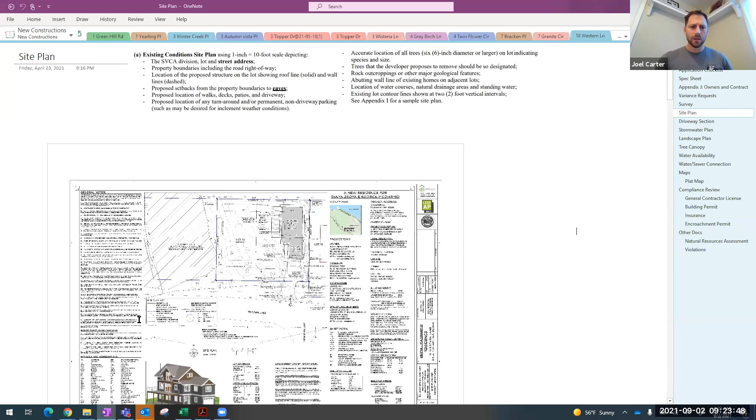I just have to share my whole screen here. All right, so you can see my reports up in the Google Drive. For the new folks here, I go through a checklist. That's part of my contract, and as we review these projects, I look for things and make sure they're all on the site plans and aligned with ACC policies.

If they're not, then I let the builder know—here are the items to address—and generally they'll come back with some revised plans, depending on how fast their designer can turn things around. Sometimes it's days, sometimes a week and a half to two weeks. And I write up a little report and upload it with all the files in the Google Drive.

This project only had two items on my checklist, and they were minor issues. They've come back and addressed those already, so I have no issues here. We meet the height definition, driveway slope is good, property coverage and open space are great. These are probably the best plans I've seen all year in terms of checklist items.

There is some wetlands mitigation occurring on the adjacent lot, which I think they're waiting on the county critical assessment permit to come through. I don't know, Tanya, has that come through yet? You're good to go? Yeah, unfortunately, well, we got approved for the stormwater portion, but the wetland is still being held up by the person there. So hopefully we'll have approval soon, but we're just trying to get our ducks in a row. Hopefully everything will go smoothly after.

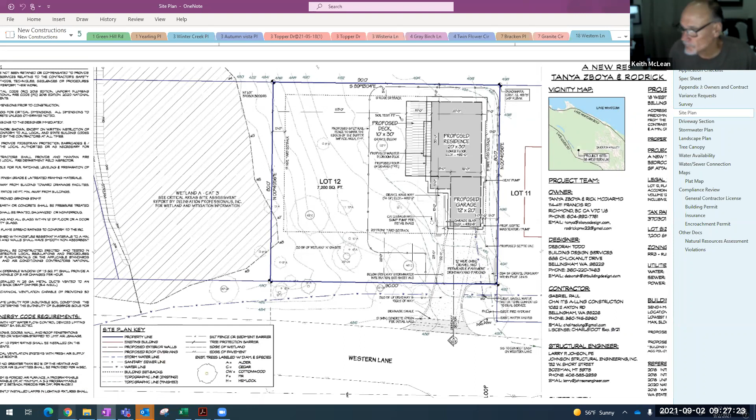So what do we have for the height? 29.8 feet.

I think we did have it marked, let's see. I don't always mark it if they are showing that dimension or not. Yeah, it's on the elevation sheet, upper right, south elevation. But I do usually run my ruler through here and check it out as well.

We're just trying to tuck a bedroom up there, so we went as high as we could to get them as much ceiling height there as possible.

Yep, there it is. All right, you're at 29, 10 inches. Okay, so we're there. We're tall, we're tall and small.

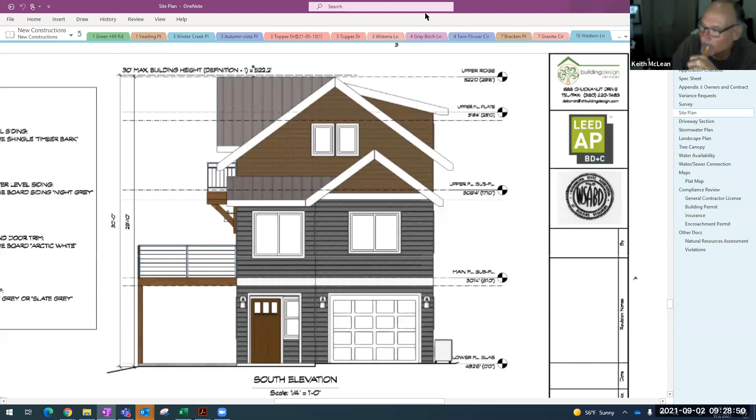Well, I know a lot of the lot had wetlands on it, so we made the adjustments.

I'm sorry, you can go back and show us what you were going to show us, a picture or something. Oh, that was it, right? I was looking for the elevations. I'm looking for just the file that has my calculations on it, but it's missing from my box of files here.

Well, they've got it listed as 29 feet. Is that 10 inches? Yeah.

So for those of you who are new here, there's two height definitions. You can take it from the lowest grade, 5 feet from the wall, and it can be 30 feet from that point - that's the finished grade. Or we can do 20 feet tall, generally from the highest grade, and that's 10 feet from the structure. So on sloped lots, you can have two different heights - you can build a home and have it be tall on one end but still meet the height requirement on the uphill side.

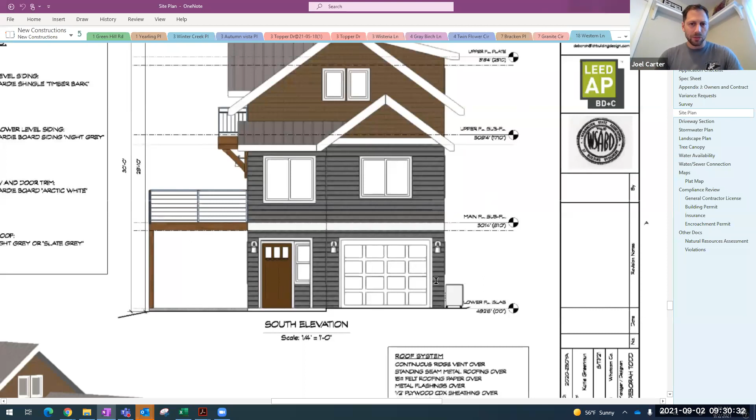So we don't have any issues with height here. I mean, we're in the threshold, providing they graded absolutely perfect.

But a new tool I wanted to show you too - I've got a 360-degree camera, so I've been going out and taking photos of all the sites during, before our meetings, and you can get a view. So if you don't get a chance to get around the lot and make a visit, I've been out there and we got trees ribboned.

So are those your photos on this drive that I was looking at? These photos right here are not the ones on the drive, I don't think. Let me check - oh yeah, I'm gonna check. These ones you need a special program to look and view. The photos up here in the drive are just taken on my regular phone.

Could you just wear a helmet with a GoPro and spin? Close - it's got a tripod and you have to hold it really, really still. But it's pretty neat, it's a neat tool. Yeah, they make gimbal 360-degree cameras for hard hats so guys can walk through job sites and do job walks with them. Yeah, that's cool. Anyway, another little cool tool, but this one's great.

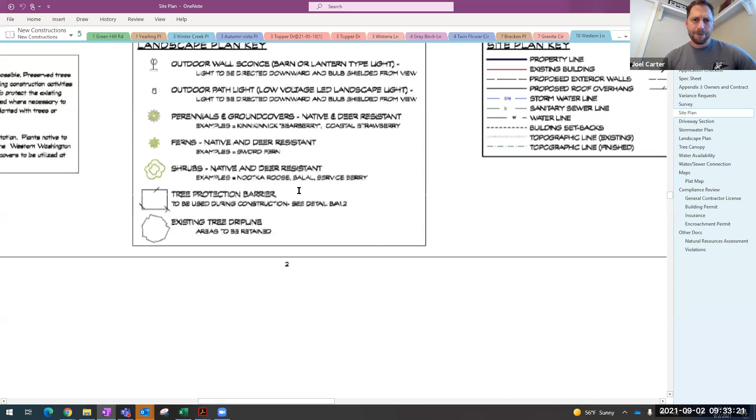All right, what do we got for tree removal? Let's see, did I mark them - there's one broken tree and one right next to it where the proposed garage is, and they're connected. So those are the only two trees that are coming down, those two. One's broken in half and fallen into the lot.

We want to keep all the trees, we're trying to build around them basically. Yeah, those are the only trees that I think were flagged too. Yeah, I saw you had a couple ribbons. That's where I was just curious, and no others.

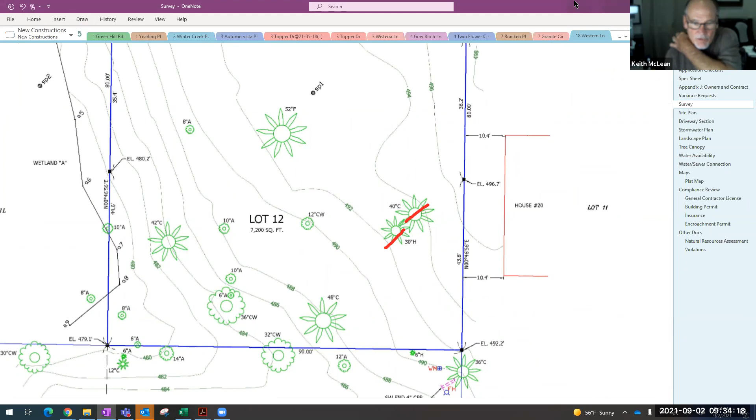All right, how about where your stormwater is going? Everything else is going to be fine. Let me go back to that site plan, blow that up. Good. Yep, under driveway, stormwater. Nice, yeah.

The turnaround's fine. Okay, anybody have any questions on this? Looks very thoroughly planned out.

Can I get a motion? I move to approve. Second. Who seconded that? Chad? Chad, yep. All in favor? Aye. Okay, it looks like it was unanimous on the condition.

You're working through the county wetland mitigation, so obviously pending that.

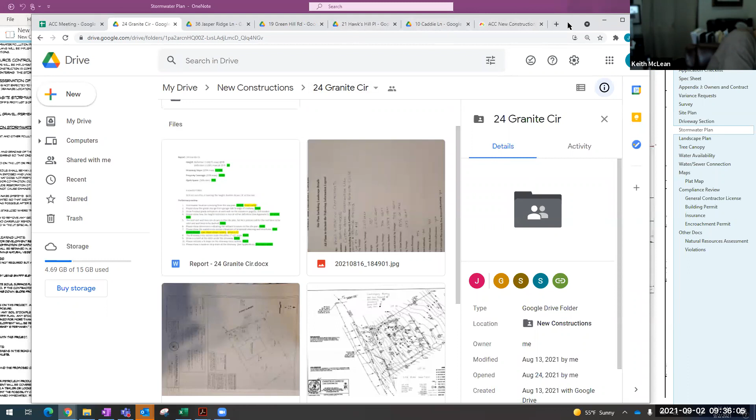Well, that was... why'd I have 19 Green Hill? This is 18 Western. Okay, all right Joel, all right let's jump to another one. I think it'll be easy. 10 Caddie Lane. This is item, I have it, it's item number 27 on the agenda. Item 27.

So let's see here. So this one, and we do have Chad Schmidt here from Rubicon to address any questions. Good morning, Chad, thank you for attending. Good morning.

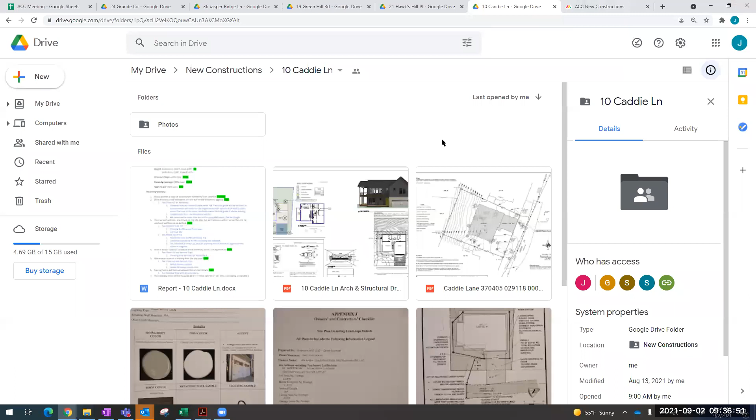All right, so here's the report. This report, we are at the 30-foot height limit, but we do meet it. Driveway slope is good, property coverage is good, open space is good. They've fixed a bunch of issues, and we do have some comments here about where to find those issues. Those come from the builder. We do have a nice flat lot here.

So little things like the driveway section being scaled, right? It's at quarter equals 1 foot. I'm not worried about it. If it's right, that's more detail than what the policy calls for. And the site plan has 1 foot contour lines, right? Our ACC policy calls for 2 foot, but more detail is fine, I don't have an issue with it.

So this was originally, I think, done by a different designer, and then it fell into Chad's hands and he had to make some modifications. I'll show you what the site looks like. So this is Gate 1, a couple of houses on either side. It's flat, pond across the road.

Trees are marked. That's a lot of trees. Here it is from the road.

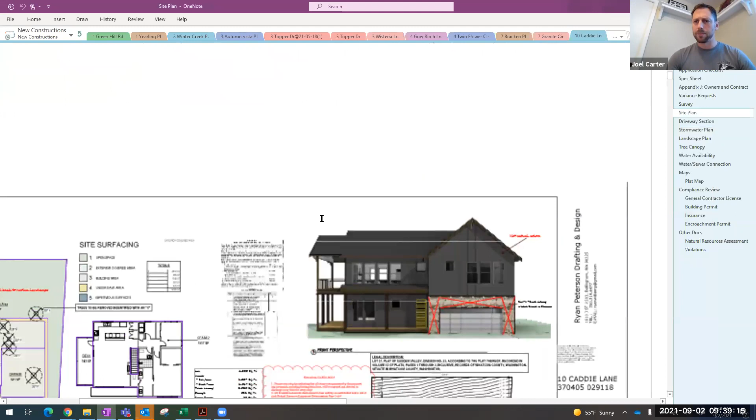Yeah, I know it is. And so it's nice because we don't have to have concerns about retaining walls and excavations. We're still taking out a lot of trees. So you can see the tree removal. Oh yeah, that makes sense now.

We're gonna keep some trees up in the front. All the setbacks are good. Yeah, let's see here. Setbacks side to side are 5 feet on either side, which is right at the minimum. The front, we're at 20. The rear is 29. Eaves are 1 foot and 4 inches.

So I don't have any issues with this. Let's see, let me get the spec sheet up in here. What was the lot coverage on this one? I can't find your sheet. 33.9. And there's 59% of open space remaining.

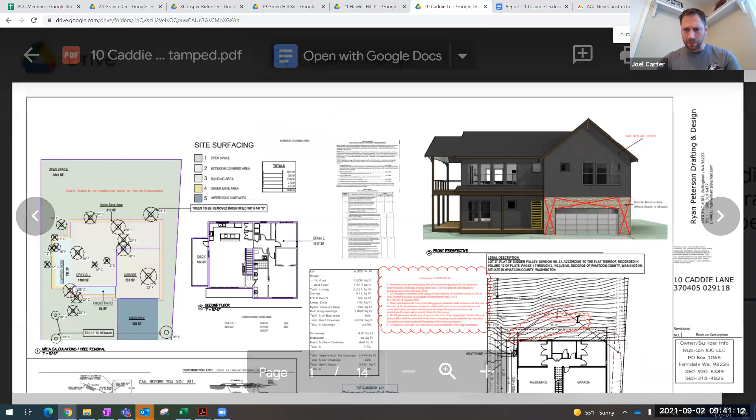Did those plans show where the stormwater was going to be located? Yeah, I think that was something that I had to send back to him. Is it on this one? So because it's flat, it's probably behind the house somewhere, right? It's up in front. Oh okay. Yeah, here's our stormwater. We have to daylight into the pond, so we had to put it up front. Oh okay, that makes sense.

The county did not want it going down that hillside. Yeah, that was my concern, the drop off on the back, because I've seen a few houses where they put them behind and it then starts eroding when it overflows. It makes all sense not to send it that way.

Oh, I was gonna just take a look at the spec sheet. I think we're good on colors. Gray and white.

So these are Benjamin Moore colors. They're not on the pre-approved list, but they look fine to me, okay. That's just me though, everyone else can weigh in.

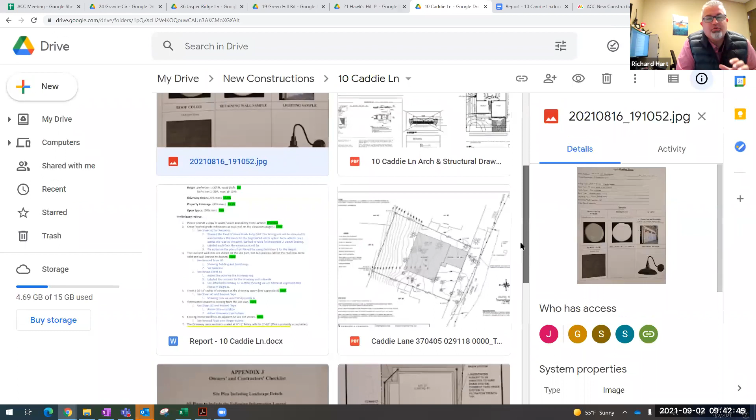I'm sure you don't want to do a nice bright yellow. Throw it out there. How about a blue trim, or fluorescent pink? I don't know if the neighbors would like it, but I would love it. Golf ball green - somebody in Bellingham would love it.

So we got it in here. Go ahead - no, it all looks good.

My only concern is we're gonna hear about the trees being removed. That's a lot of trees coming off and people are already concerned about what they're deeming clear cutting, and I get it - it's your house, and everybody lives here, and trees had to be removed for their houses to be built, but I don't want to take out excess trees just because the opportunity arises. I'm doing new construction, but it looks like all your trees - can you go back to the tree removal plan?

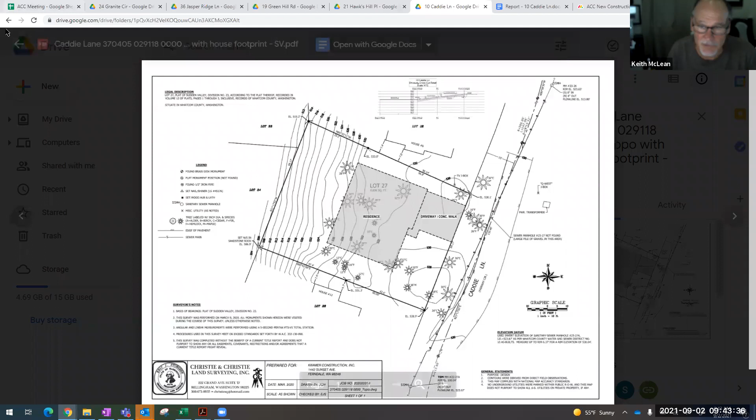Yeah, most of them are within the footprint of the house. Wait till he gets it up here.

I get it, the community doesn't see this - they don't get to see, hey, the footprint of the house, you're well within your lot coverage rights and abiding by all the rules and guidelines. The house is supposed to fit the lot, and reducing the house size, I can't see really making a big difference in the amount of trees that are gonna have to be removed. So that would be my only concern. I don't know if anybody else has any concerns or questions about that.

Is there a landscaping plan? We do have it filled out - it's upside down, but he's gonna replant 13 trees, right?

Yep, 13 trees and 52 shrubs that are recognized through the Whatcom County Association or Natural Resource guidelines. There's gonna be tree replanting and then...

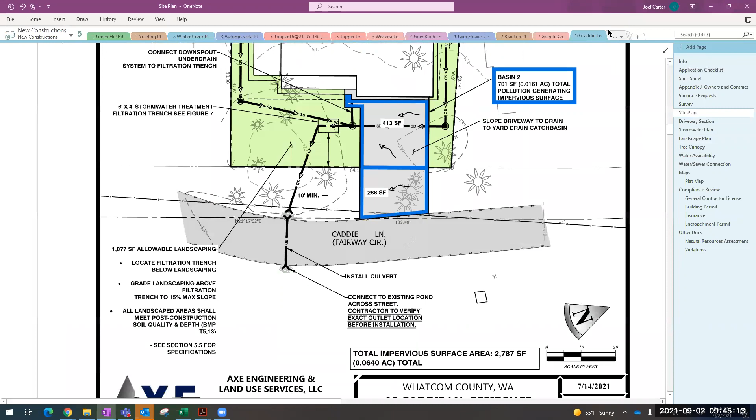I think it was on that plan - the one you put up right there. Plant locations, 13 new trees, 52 shrubs. All disturbed areas to be replanted in native landscape with mulch and new trees and bushes per Whatcom County plant schedule.

Perfect. No yard on this house - that's quite a slope in the back there. Was it about 20 feet in elevation?

All right, can I get a motion on this project? I'd like to know what color the garage door is. The picture was of white.

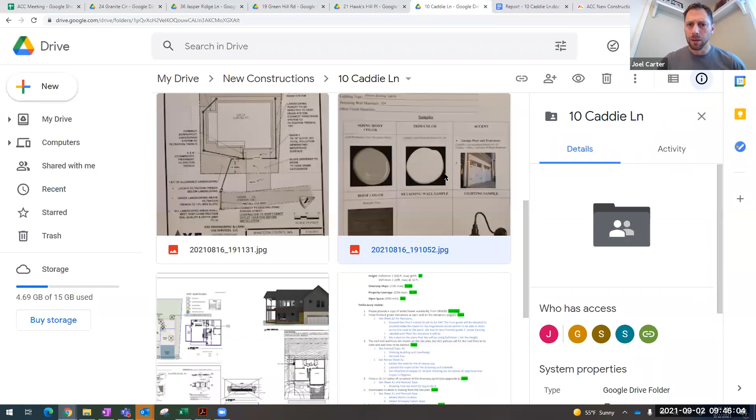So part of our conversation is that the garage door color should equal the body color - it says unless otherwise ACC approved. So they do have it proposed to be white, is that correct? It's the trim color, it matches the trim, so it's not the color of the body of the house.

He's asking for somewhat of a variance on this one, to paint the garage doors white and not the same body color as the house, and we can't allow that unless we all deem that appropriate with this house color. A lot of the houses do that now anyways. That's the problem - people keep painting it white because that's the way they come from the factory, but that's not what the guidelines say.

Are those the type of doors you're gonna put in, the decorative doors with the... exactly. It meets the architectural look, kind of the Northwest Farm look, to fit within the architectural look to match - the black hardware and everything on it.

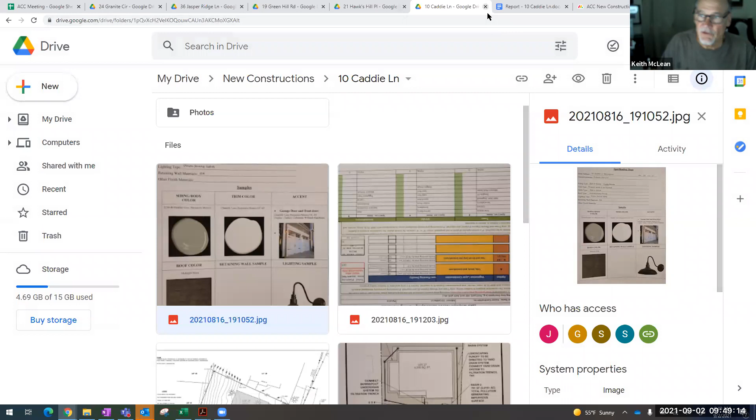I'll second. Okay, all in favor? Aye. Aye. Okay, that is unanimous then. That has been approved. Thank you very much for your time.

I appreciate it, thank you very much, and I apologize for not having as good a set of plans. We did not draw this one or prep this one. We bought it already like this and did what we could. We're going to Rubicon it, as we call it. Chad, I'm going through that on two of the houses I bought from Arrow. Yeah, I feel you, do our best to make it look really well. Great, exactly. Good luck, thank you guys.

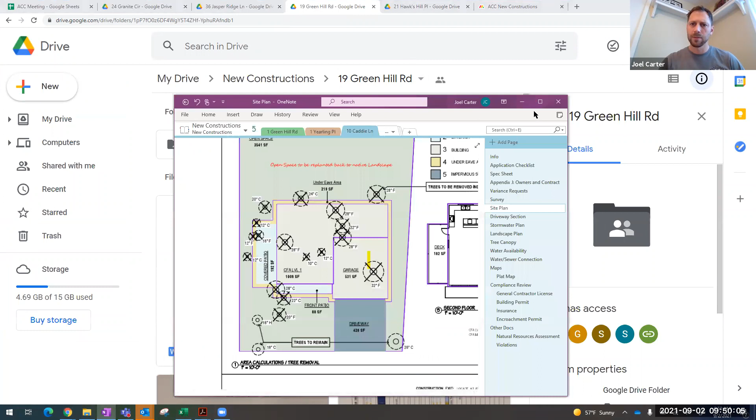All right, let's hop over and do 19 Green Hill. So this one, let me make sure, see if our builder's in here for this one. Yeah, so Sergey's here. Isn't that the same one we just looked at? Oh yeah, no, I'm not there yet, I'm checking the builder. Oh okay. So Sergey's here for 19 Green Hill.

So on this one, most things look good. We do have, I think, a variance in for the height, and then we're a little bit over the property coverage, open space. I think this has been recalculated actually to be, where is it, 36? About 36%, so we're only about 1% over. A lot of those small things have been fixed.

Existing home wall lines are not shown, unless it's really close, going to be close to the house. I don't see it as a big deal, and I don't think during a site visit. Let's check it out here.

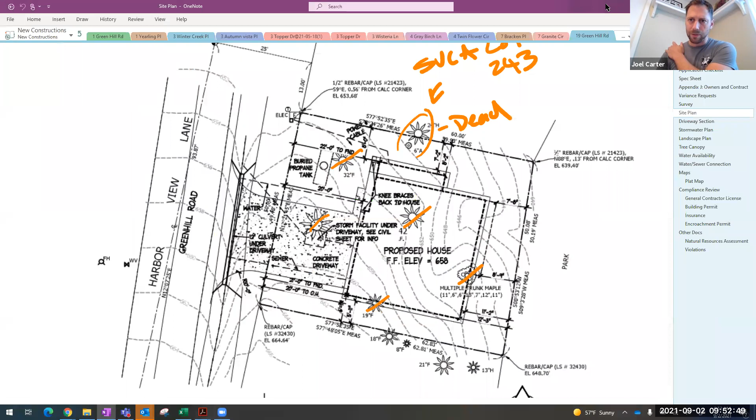Let's see, but one thing to consider on these variances too, we do have a very small lot, I think it's 3,071 square feet. So one of the challenges presented by these smaller lots is that a house, for the ACC policies, needs to have a minimum 1,000 square foot footprint. But then there's also the 35% property coverage rule, so the footprint cannot exceed 35% of the lot.

So if you have a 3,000 square foot lot, 35% is 1,050 square feet. So it has to be a minimum 1,000 square feet, but it can't be over 1,050. So there's a really small window there. This house footprint, well, this one's a little bit bigger, so we're at 3,071 square feet. 35% of that is 1,075 square feet, and this footprint's measured at 1,109. So just a little bit over. Something to consider when you're discussing the lot coverage.

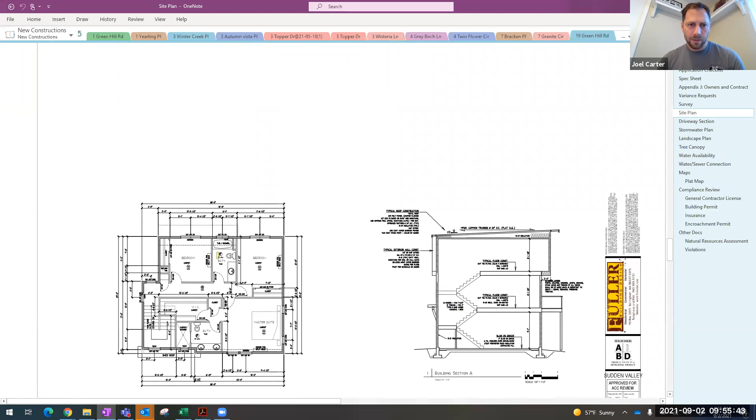So this is our garage, and basically we've got a laundry room and stairs up. Then our 2 living floors are each going to be about 1,000 square feet, same as the footprint. So our first living floor here, we've got kitchen, dining room, living room, and then we have bedrooms upstairs. Three bedrooms upstairs and a bathroom. So that's part of the reason why the house is tall, and we've got that variance. Does that make sense? It's kind of like they need to have 3 stories here for their house to work.

What's the ceiling height in between floors? Oh boy.

About 8 feet, 8 feet 1 inch.

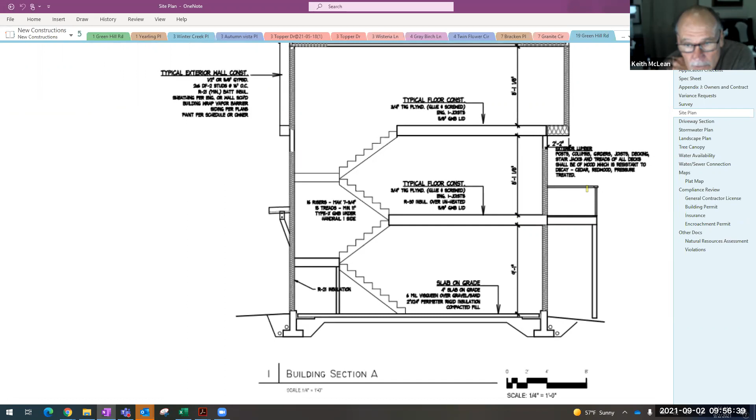Okay, so something to consider when you're discussing the variances—do you have a low slope roof? Yeah, I saw that.

What was the total height? 44, yeah, well it depends on where you're measuring from. Definition 1, the 30 feet, so from the bottom is 44. Definition 2, the 20 feet from the top is 24.75. If we're looking at the 20 foot, they just have to meet one of those height definitions. Then you're only 4 3/4 over.

What does that height do to the neighboring homes next to it? It's not going to tower over this one. This is the neighboring home, up the hill.

Let's take a look here. Let's go back—they don't really have any windows on that side anyway. And it looks like it's also a 3-story there. 1, 2, 3.

Yeah, it's a significant slope. There's not a lot you can do, and it is a super small lot. I think they're super small, but has the county granted variances for the lot coverage and height?

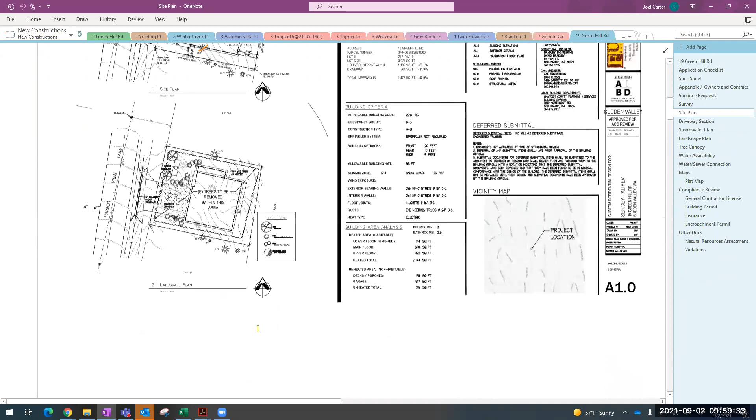How many of these houses do you live in? There'd be a lot of owner builder.

That's interesting, I'm surprised the county didn't have an issue with your lot coverage. You are over the lot coverage. The height is more of our issue here. It is a towering structure, man. I have to be honest, I think my house is about that high.

There's one second here. I do have—so the lot on the other side, this lot north of it, is an SVCA owned lot. So I don't believe anyone would be building there. Let me find it on the map here just to be sure. The green space lot, that's what you're saying? Mm-hmm. There is a dead tree right there as well. I saw on site that—

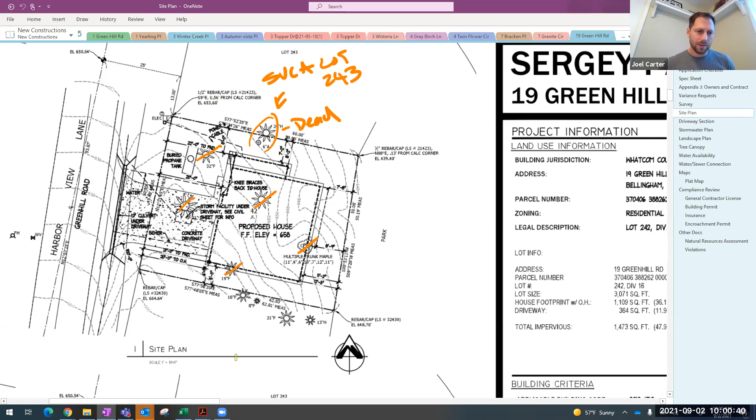I think it's gonna want... where do we have it here? Oh, you know what, I probably have photos of it. It's this one that's covering the maples, covering the leaves. Here it is, this one. So there's a dead tree there that I think is on the SVCA lot.

I'm not sure, maybe Deanna can shed some light on the tree stuff because the ACC coordinator usually handles that. How close is it to his property? Isn't it right on the line? Yeah, survey shows it being real close. Whoops, this is the wrong plans.

It'd be a heck of a lot cheaper to have it removed if you're already removing other trees than it would be to come in after the house is built and pay for a guy to climb that and drop it in 3 pieces. Yeah, we'd have him remove it if approved under his deal. Yes, that's kind of one of the things I was thinking—I'd be willing to take it down myself, just because it's right on the border there and it's a pretty dangerous tree.

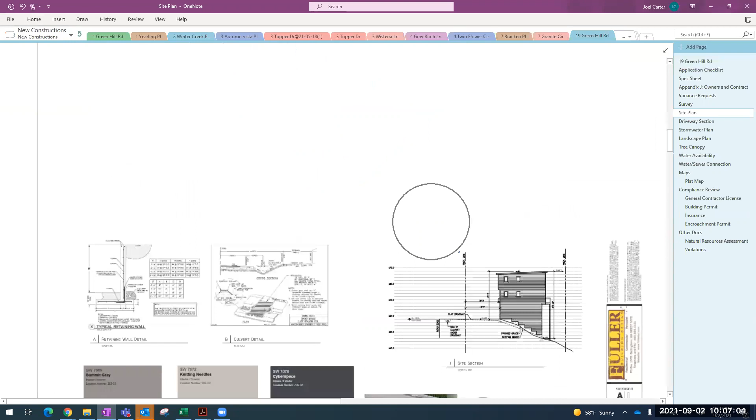Keith and guys, if you look at the way the house is sloped, the roof is sloped towards the front, so the perceived height is going to be less than what you're thinking. It looks like if it's a 1-2 pitch, then it's going to be almost 1.5 to 2 feet lower than the back of the roof. So at the front of the house, it'll look shorter than it's actually showing on the plans.

So the variance is what, from 24 feet to 29? Is that what we're talking about? Yeah, 24 feet is our limit, right? For this, 20 feet's the limit. It's at 24.7. So yeah.

I'm okay with it. I've seen this other house because I'm building on Kinglet right now. So I've seen it, and the house looks nice. It's a nice looking house.

Hi, this message is for Keith. This is Teresa calling from Mount Baker Vision Clinic. I was just calling to confirm your appointment. Sorry about that, guys.

So do we need to approve the height variance first, right? Yeah, we need a motion on the height variance first, and then we also need a motion on the lot coverage. It exceeds the lot coverage.

Okay, like I said, I've seen this house before, so I'll move to approve the height variance. And I would need a second. I'll second. Okay, second by Joe Jean. All in favor of the height variance? Aye.

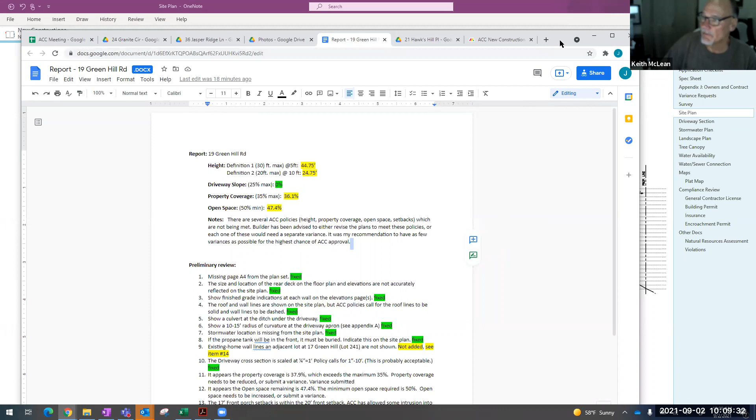Are you on the right one? I am on your owner's checklist. Appendix... owner's contractor's checklist. Okay, hang on, for design. You're looking at this appendix A. Yep, right there. Yeah, his actual plans call for, yeah, that right there.

All right, so is this incorrect then? The owner filled that out. That's not your thing. And so you're saying he's at what percentage? About 47, probably. It says 47.9% on the plans. So he's...

My understanding was that was a county requirement at 50%. Is that not correct, Joel? I'm not sure what county... if the county looked at their requirement and saw it at 51%, they'd think it's fine, not a problem. If the county approved it, that would be the condition I'd have to put on there, pending county approval.

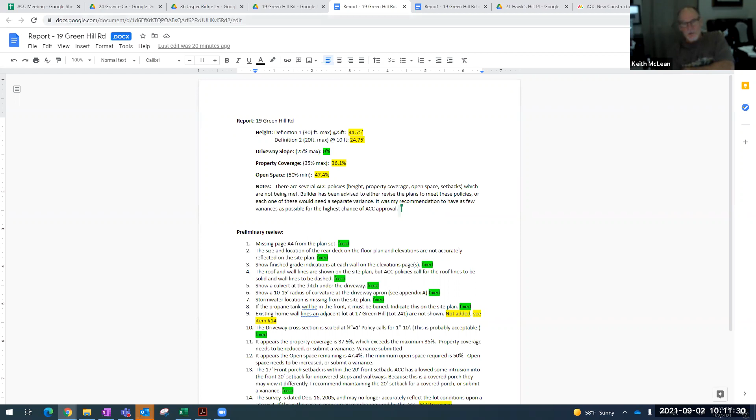I'm surprised, I really thought the county was 50% and we were in alignment with the county on that. But we can be more strict than the county, so that's why we're asking. His impervious calculation on the plans is 47.9, which means he's over 50% open space.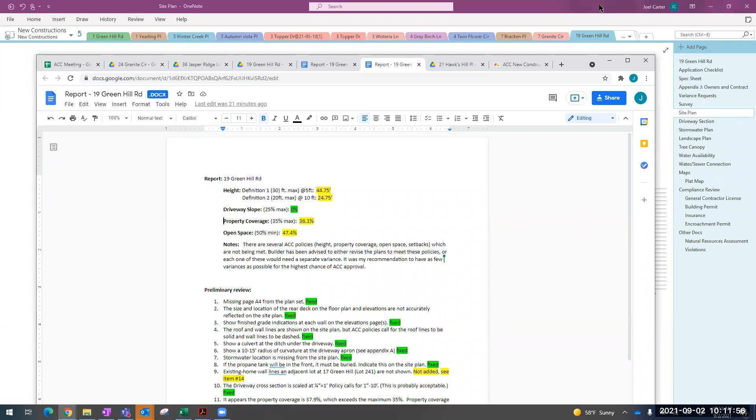Let's go back to that. The total impervious calculation on the plan shows 47.9%, which means he's essentially 52% open. Yeah, that would be correct, but I'm looking at it differently for some reason.

Joel, can you bring that back up? They'll show the impervious, but the way Sudden Valley calculates open space also includes decks. Even an open slat deck would be considered pervious, if it's not an overhang deck, then you have to add that to your open space calc.

Go back to your sheet on that, if you would, Joel. So property coverage for a house, that's just the footprint of a house, shouldn't be no more than 35%. He's at 36.1. But the entire open space can't be more than 50, and he's at 47.4. And that includes his decking and everything? Right.

Well then he doesn't need a variance for the open space. The only thing you need is for the 35% -- he's at 36.1, and he's still under the 50%. So I agree, technically we shouldn't have to issue a variance on it. It's really not that big of a deal, in my opinion, but I'm just one guy here. If everybody's in agreement with that, then I'll just move to approve the plans as is. Any further discussion from anyone?

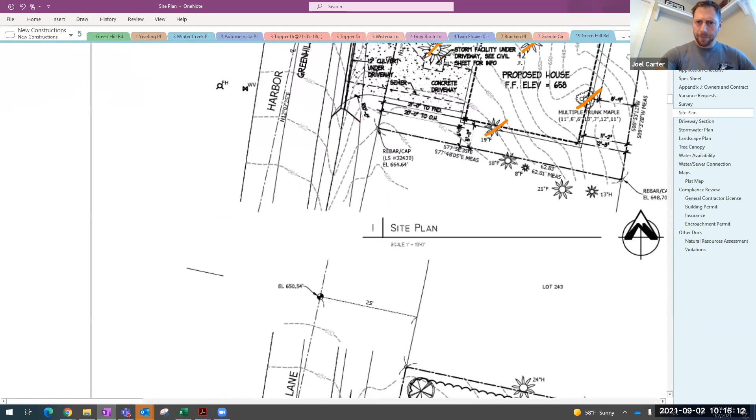This guy here, yep, that is correct. And the 8-inch is dead. So this one's dead too.

And you're willing to remove both of those? Yeah, providing you get the neighbor's approval. Yes. I'm in agreement with that.

So you'll include that in your county permit then? Yeah, okay, unless she's already got it permitted and then you're covered.

All right, did we look at the colors and all on this? Pretty sure it was gray, and grayish. Oh, nice picture there, yeah.

So here's the damage on that bigger tree that's being proposed to be removed, and then the dead one's the small guy behind it. There's some replanting too on this one after all this stuff is done.

I would have to confirm with the neighbor on what their plan was. Well, just overall for your construction plan, was there a landscape plan somewhere in there? Yes, there is.

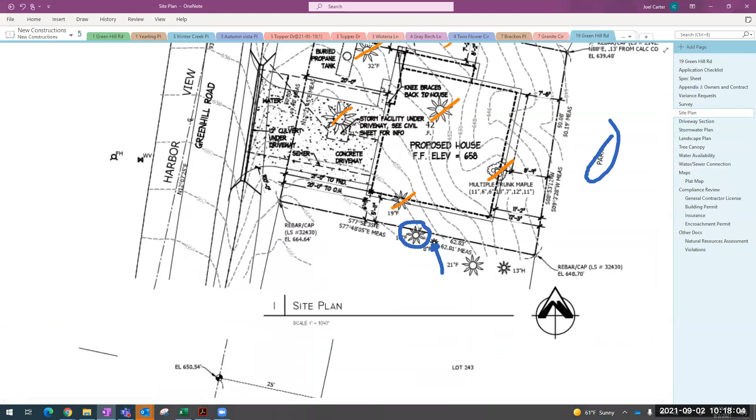Anything else on this one? Do you have his landscape plan, Joe? Yeah, let me pull up the...

Oh, where am I? He's got the plan, he's got the Lake Whatcom planting worksheet filled out for the county, and he's got location, plant legend, location and description, placement and description of plants, rock features, fences.

I think the only issue that I see is, especially where the elevation starts to drop off behind it, might want to replant ferns or something other than just mulching the back. That tends to be an overlooked thing in a lot of our new construction, the backside where we're not putting anything back to retain the hillsides.

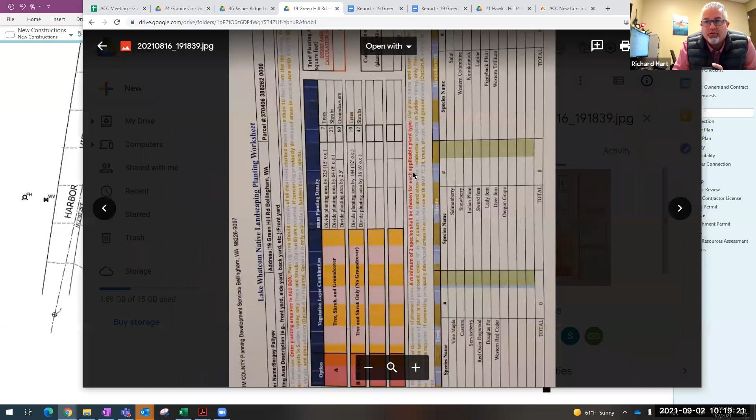Yeah, we'll be putting something. I like ferns and how they look and everything. We'll be replanting all of that, and just talking with Mike Kirshner about like 4 feet to 6 feet and just filling the whole area with plants.

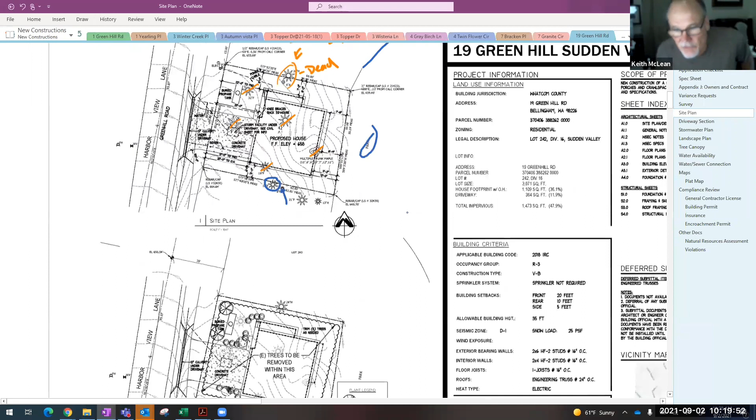Okay. Okay guys, any other conversation on this project? Okay, can we get a motion?

I move to approve with all of the variances that we've discussed. Second. Okay, all in favor? Aye, aye. Okay, it's unanimous, it's been approved.

All right, thank you very much. Thank you for your time. I appreciate it.

All right, let's see who else is in here on the meeting. We've got Connor and we've got Pavel. Pavel's got two builds, and Connor has one. So let's go, you want to start? You want to start with the one? Yeah, okay.

So we're at 20, this is 21 Hawks Hill Place. We're at the top of a hill in a cul-de-sac.

Steep, so we are on a steep lot here, sloping downward. You can see here's the cul-de-sac, houses across the street, a house to the side. There's a lot in between this house, and then we're just kind of going downhill there. The pictures on this one aren't great.

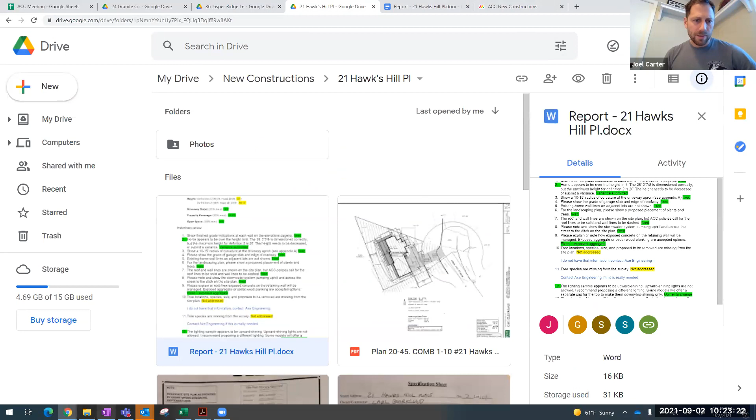And so what we're looking at here, let me grab it up here. Where's my stuff? I'll just use whatever's on the drive here.

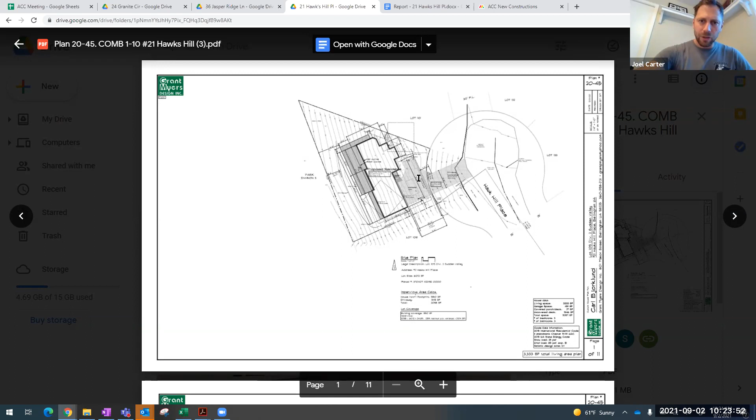So back's dropping off. We're at, and I don't think this one's going to look out of place or really tall from the roadway. Because it's sloping down toward the back, and you can see our cross section here, our elevations page. The driveway is going to slope down a little bit and then be an elevated flat platform. So from the street level, it's going to only appear to be a one-story house, and that's consistent with the house next door to it.

What's the bridge made of? Is that just wood, a wooden walkway, or is it going to be steel reinforced? It's going to be steel reinforced concrete. Concrete, okay, yeah.

And from the road, Joel, to your point, it's only a little over 11 feet taller than the road. I don't think we're going to be blocking anyone's view here with this home. So I think the height, the variance request is reasonable given the steep slope of the lot.

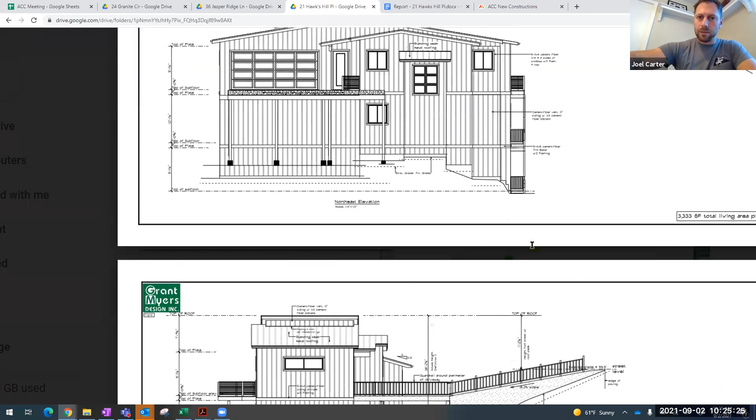So looking at this elevation page from the front of the house, you can see where the garage is going to be and where the driveway exists. It's only going to appear to be a one-story house, or it's going to drop down even a little bit from there.

So there's a variance for the height. What else do we've got here? Let's talk about... yeah, that's mostly it. Driveway slope is 18%. Property coverage is under the 35. Open space, we have 56% open space.

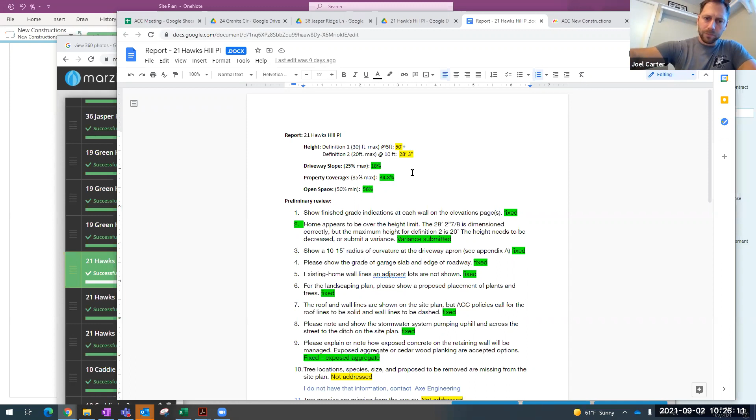They've come back and fixed a bunch of things from the checklist. Mostly just the trees to be ribboned is the only remaining thing. But what else? I guess let's take a look at house colors.

I think they're going to go in with a green. So it's not a Sherwin-Williams color, it's Benjamin Moore. So the house color needs to be approved. I'll have to double check the list, but I'm thinking it is, because I told Carl, I sent him the list and I said pick one from this list for that reason.

Was it? I can pull it up real quick. Could be. He could have went rogue.

It looked like you were going with a bit of a fancier garage door. Is that going to be painted too, or no? Possibly, it'll either be matching body color, or they might go a little fancier. Did you have a question specifically on that? Well, it's supposed to be the body color, but from that drawing it looked like it was gonna be a nicer garage door, so.

Like some of those glass windows or something? Yeah, it would either be body color or potentially like a fogged glass window. Okay.

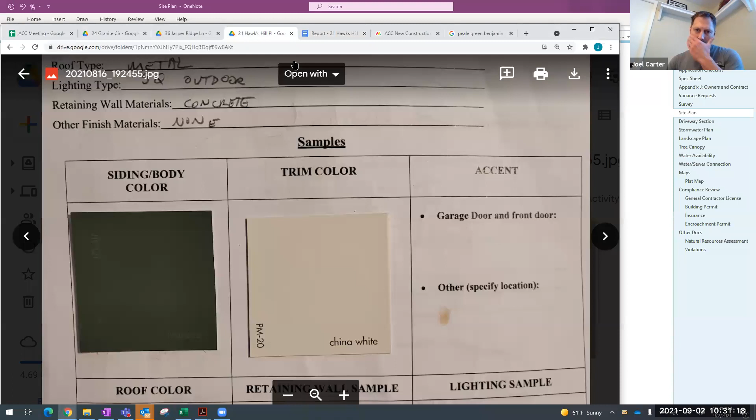So let's hop over to, let's see here, looking at the, excuse me, the plans here.

And they've got it marked out here. They have it dimensioned at that 28 feet.

Okay, while we're looking at that, what is going on the retaining wall? So you've got the concrete drive retaining wall in the front. What is that being faced with? It's going to be, let's see, I believe exposed aggregate. Did I write that in my report? Yeah, exposed aggregate is what it's going to be. Correct.

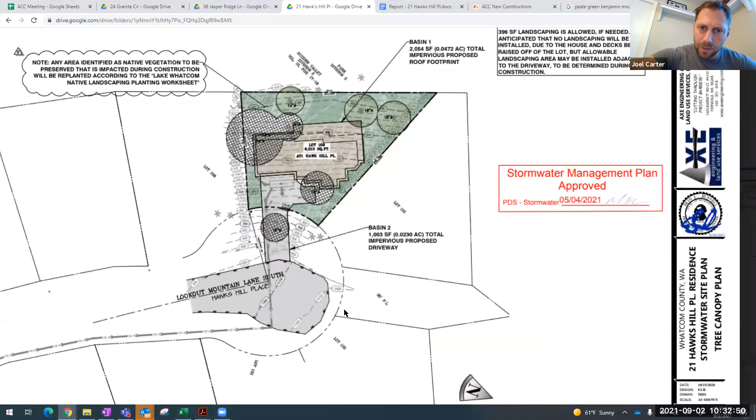Yes, here they do have the engineering tree canopy removal. So there's going to be 1, 2, 3, 4 trees to be removed. Yeah, they were missing from the site plan, and the designer said he couldn't, said that information belongs to Axe, and this is Axe what we're looking at right now, and he told us to ask Axe for it. But these are the trees here.

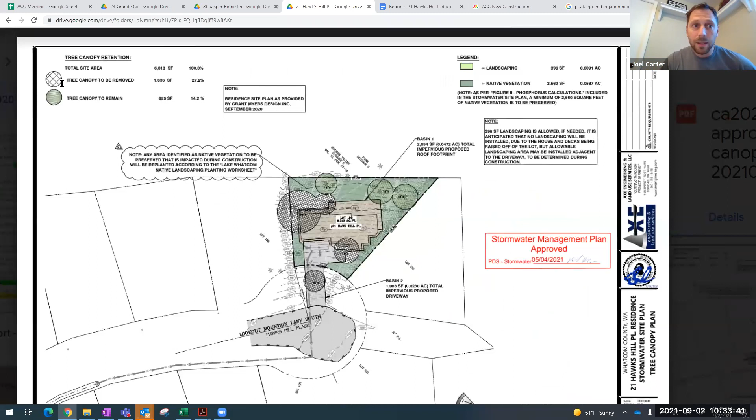All right, and what's his replanting looking like? So there is a note here. It says any areas identified to be replanted per the Lake Whatcom Native planting worksheet. Okay, go back here.

Just this, are there structural plans for these yet? Are there structural drawings for these yet? Yeah, we had them, right? They're in there. Yep. Full set.

Sorry, I lost track of what was it. Planting. Landscape plan. That's on the site plan, Joel, and it shows vine maples and sword ferns. Zoom out. Oh, I've got a different site plan in front of me, which I thought you had as well. I could shoot it over to you really quick because it has specifically that on it. Yeah, maybe it's different from the digital ones that I've got. I don't see it on mine. Give me 1 second here.

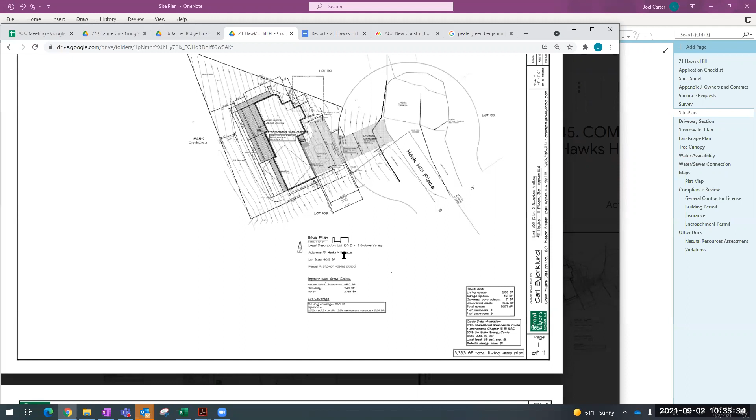All right, Joel, I just sent it your way. But for email - yeah, I sent it right to your email. I could illustrate what's going to happen while we're waiting if you want to jump over to that site plan.

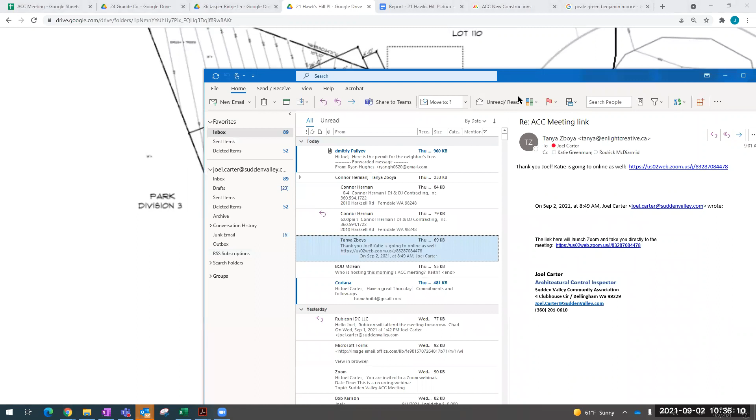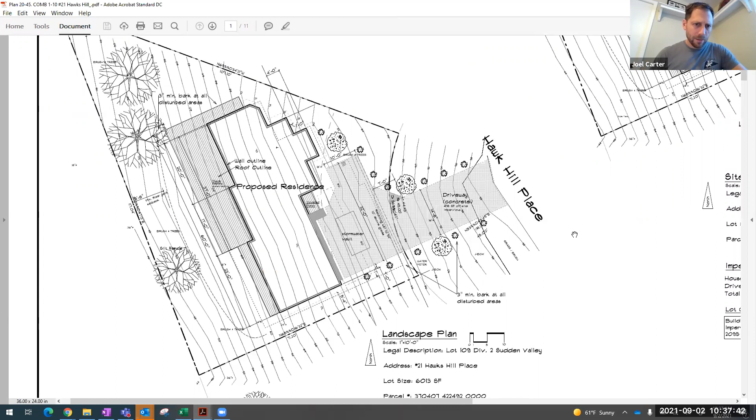These might be the original plans, are they? Yeah, I do remember seeing this. I don't know why. Maybe I left the old plans in the drive. Excuse me.

So do you have landscaping? Anything? Yeah, any area identified native vegetation will be preserved per the Lake Whatcom native planting worksheet.

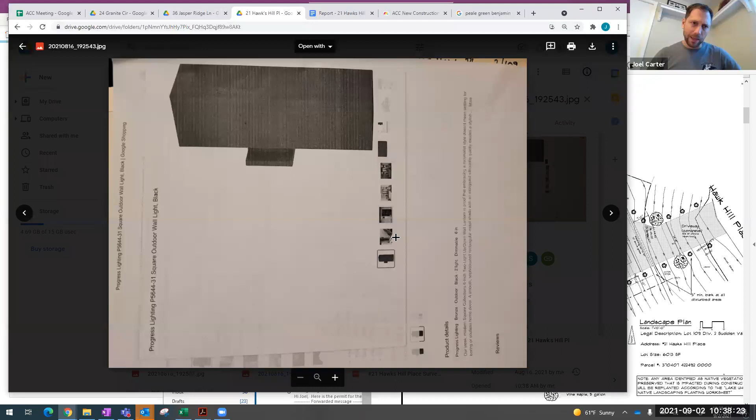Everything else, I don't have any issues with. I think this lighting sample does show that it lights up and down, and I think that was something he's going to pick out, new lighting that doesn't shine upward. Yeah, they make that same light that only shines down.

And I'll go back out and verify that the trees are ribboned. Here's our variance for the height.

That's it for this one, unless does anyone have any questions or concerns? Anything else I can show you? Yeah, the same concerns, the height. The height concern - I get it though, looking at it from the street, it won't be that high, but it still exceeds our height limit.

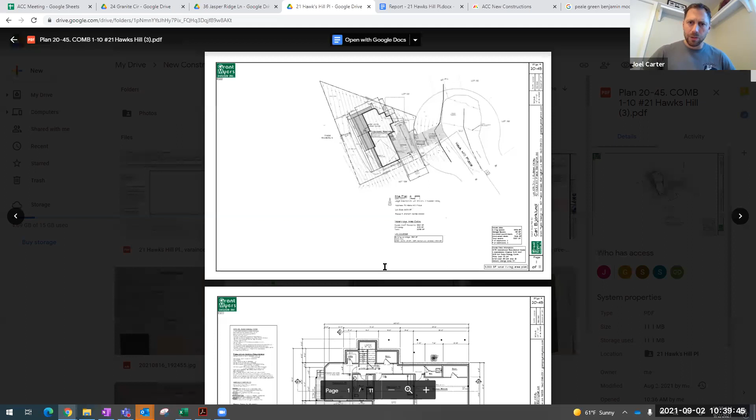So you are on quite a steep lot. Yeah, I think the challenge would be, if they're gonna try to get within that 20 feet, they have to lower their house where it stands 8 feet. Then that would exceed the driveway slope. It's a catch-22, yeah, we don't want to go there again.

All right, can I get a motion on the house with the caveat too that the trees need to be ribboned? They need to be ribboned. Need to see what's being removed. Yeah, last I heard he was working on it, or he was going to go out there and have them ribboned, and I'll verify that. I'll check in on it as well and make sure if it's not already done, I can get someone out there ASAP.

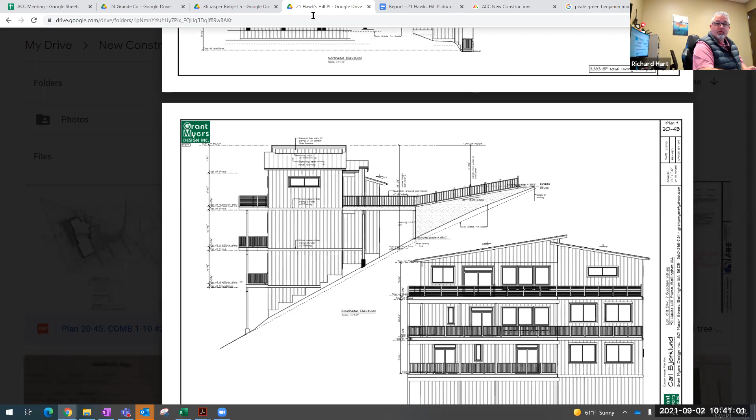All right, any motions? Need a motion. I move to approve with comments. Can I get a second? I'll second it, okay, that was Justin. All in favor, as submitted with comments.

Do we still have Chad? Chad, did you have an opinion on this one? I think earlier he was in favor of it, if I'm not mistaken. Any opposed? Sorry, I didn't realize I was on mute. Yeah, I'm good with it. Okay, it's unanimous then?

I'm still curious to see how that driveway connects to the building, because it looks like it's trying to connect a hanging concrete slab to wood, but I'm not your designer. I'll just make sure that's fully designed, because there should be a concrete wall underneath of it. There will be, and Carl and his brother Mark, who own this and are building it, are very experienced concrete guys that have been doing it their whole lives, and they've done lots of floating stuff like this, so it'll be better than expected.

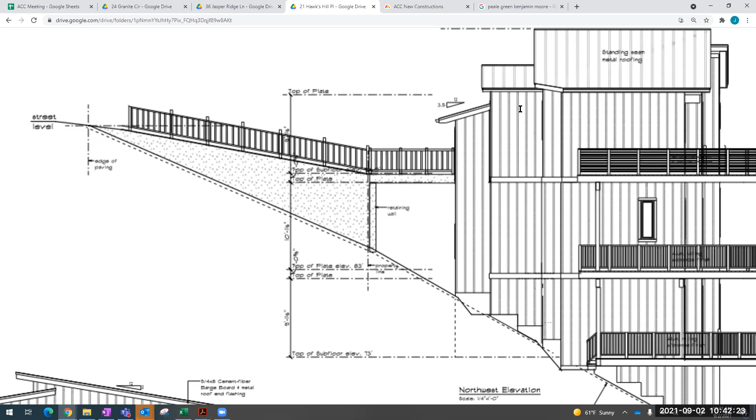Cool, all right, very good. So that passes, approved unanimous, and with Joel to verify the ribboning of the trees, make sure what's being removed and we're not in excess of what needs to be removed.

And this paint color, remind me, was this approved? That was approved. I prefer something off our approved list better than those, but that's just me. It's always easier when it's off our approved list, makes it an easy thing. I'm not great at paints, I'll be honest with you. So, all right, you've been approved. Thank you very much, Connor.

Yeah, I always communicate that with the builders too. When they submit something, I say, here's our pre-approved list of paint colors. If you pick something out over here, there doesn't need to be any discussion about it, should be automatically approved. Oftentimes they like to pick paint that's not on there. They can do that, but I tell them, you can do this, but there will be, it does have to go up for discussion.

All right, next up then, our last two, we're moving right along here. Last two, 24 Granite Circle. And we have Pavel here as the builder, for Granite.

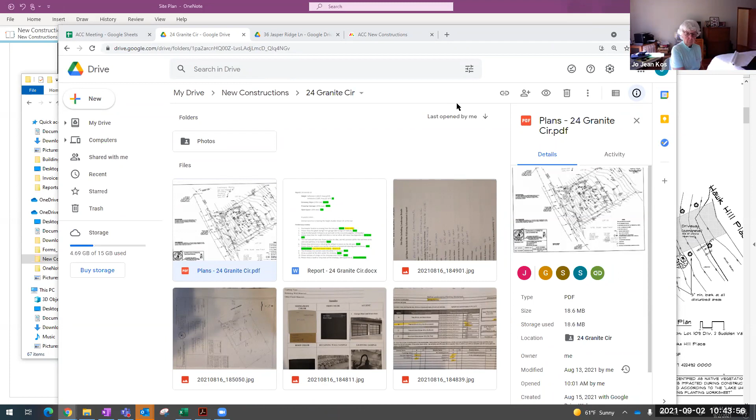Pavel, are you there? Can you hear me? Yeah, can you hear me? Yep, there you are. Oh, hi. All right, welcome, thank you.

All right, so here is my report for 24 Granite Circle. Good news, no variances on these ones for height. Driveway slope, property coverage, open space, we're all within the ACC policies for those. This is an old note.

Couple minor things, stormwater location. The stormwater location was added to the site plan, but just showing the outflow wasn't there. And then the other thing was, please show the scaled cross section elevations of the proposed retaining wall structure. So he came out with Allan Blocks saying, here's the Allan Blocks, this is what we're gonna do. The spec sheet shows a rockery.

Any retaining wall is going to be a rockery. But then on the site plans, and these are actually hand-drawn plans, believe it or not, they look pretty good. Oh, this one does have the, so you got a rockery there.

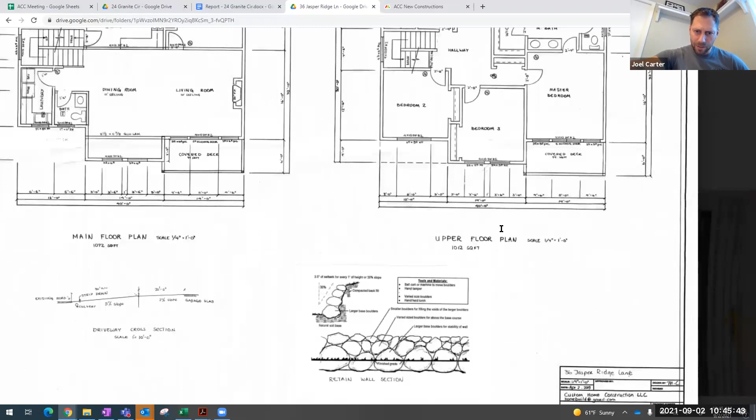Where was the? It was on the Jasper. Oh, it was Jasper, yeah. Sorry, am I on the right thing here? Okay, Jasper, 24 Granite Circle. Oh, this is the 36 Jasper file. I've got it, yeah, sorry. 24 Granite is where we're on here.

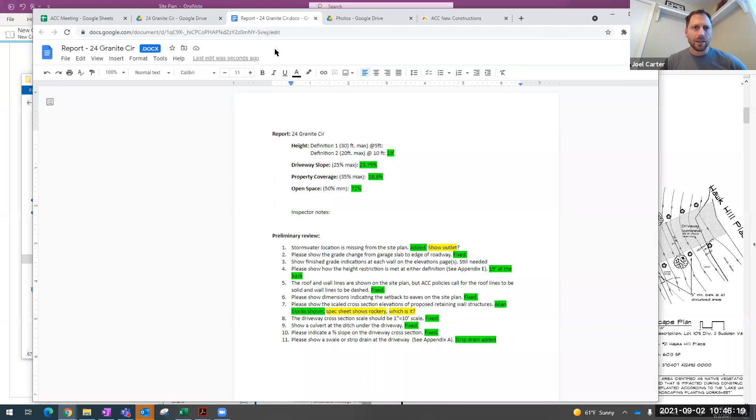So this one, you've got your Allan Block wall as your proposed one, but then on your spec sheet you've got the rockery rock wall. This was a question just for the builder, I guess. Did you, which one are you going with? Yeah, which one are you going with? Allan blocks. Allan blocks, okay. Yeah.

Okay, what else? Oh, the only other thing, and I think I asked for this as well, is just having the finished grade indication at each wall on the elevations pages.

You know what, I'm just gonna hop over here. So just knowing what our elevations are going to be at the finished grade on each wall. So what would the elevation be up here in this corner? What's going to be down at this corner? So showing the slope, and the rise and run of the finished grade.

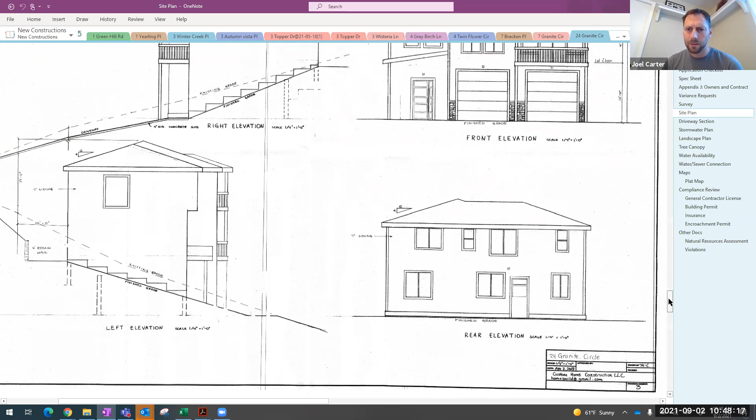That's the only thing missing here. I think I sent you an email, Paul, and I showed you an example in that email. Looking for it, but everything else came back okay.

Is this the one where they are mirrored? No, this one's good. Okay, that's the next house.

What was the elevation height back there, when you're looking at the front elevation of the house? Keep going down, I think we were going from the back. Right there on the right side. I believe it's 35 feet.

Are you asking about the height, or the elevation of the finished grade? The elevation of the finished grade. Yeah, that's one thing we still needed from this build.

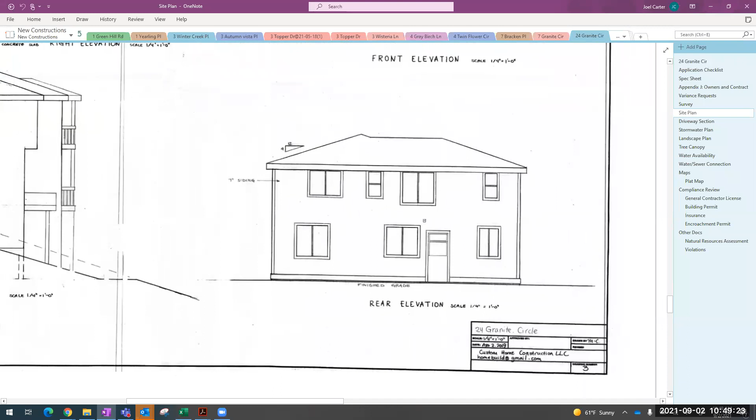It's on this, on the left. If you scroll it to the right, yeah, there's a 19 feet. But no Paul, they're not asking about the height, they're asking what is the elevation in feet here, or here at the garage? What's the elevation, the topography? Oh, topography elevation, yeah.

So you'd label it near the back - if it's going to be at 672, then you'd show it as 672. And then in the front, looks like it'd be 650, maybe 658. I suppose those going off these contour lines, but if you're going to be excavating and lowering the house down, that's what we're gonna do, lower the house a little bit. Maybe at like 2 feet, or maybe 654.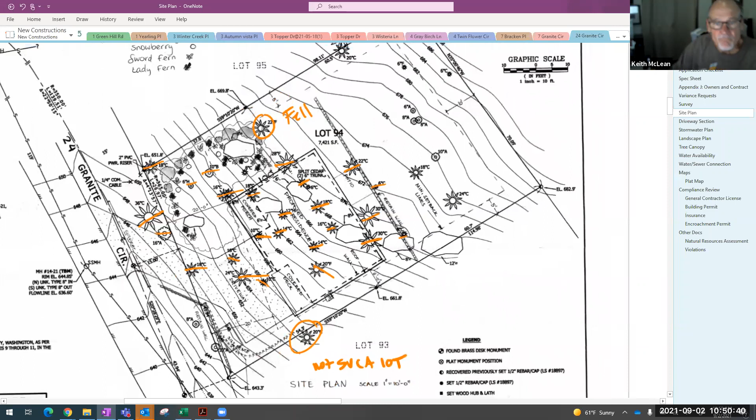And that rear retaining wall is running all the way over to the property line? Yeah. And we're gonna use Allan Blocks for that. And that's why it's gonna be a little bit lower there, lower in the front.

And behind this property is Sudden Valley land? There is a small park, a parkway up there, but there is a house on the other side of that. Let me see. Oh, I got it's 28 Granite on here, but this is 24 Granite. We're in the right spot here, yeah, this 24 Granite, so you can see uphill. Yeah, somewhere back there is a home existing, which is good. And there's one across there also on the left, and there's one building on the right now. I think they're putting a couple houses over this property. Yeah, there's I think a couple lots down here. I'm just pulling it up on my map.

So looking at this lot here to the left, up the hill, up the road, that's adjacent to it is this SVCA owned lot. Behind it, there is a Sudden Valley owned kind of a parkway, green belt. And then to the right is another, not an SVCA, private property owned lot downhill from it.

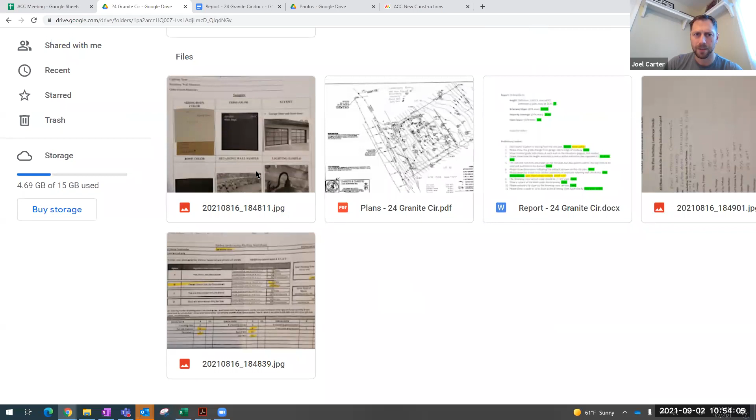So other things, we do have paint colors. I think it looks nice. Pretty close, yeah, I think his colors look nice. Okay, myself, that's just me.

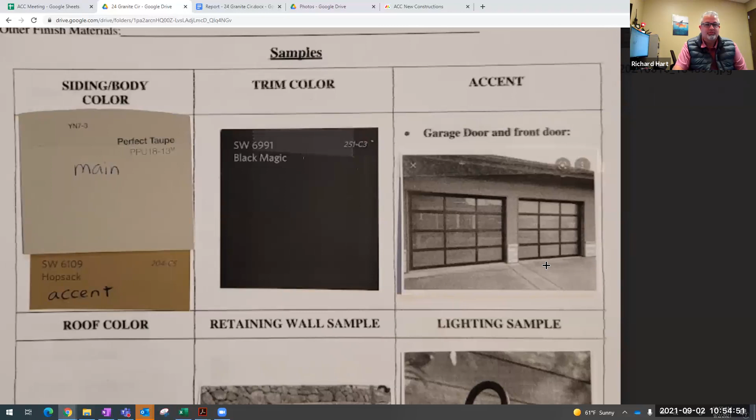Are the garage doors going to be painted black magic? Because that's important. The garage doors will be same thing like you see on the picture - they're going to be fog glass, and the trim is going to be black. Okay, yeah, I do like the black magic color choice, I'm just saying I love it. Yeah, that would match the trim color and fascia color, that's what we're going to use.

Yep, looks nice. Okay.

How about that lighting, let's look at that lighting. Yeah, looks like this, I've seen some lightings like these before, points down. It's up to ACC - is this considered an exposed bulb? Is it shielded from view? Depends on how high they get mounted. Right, yeah, it's gonna be just above the garage, and this light's called gooseneck lighting, and it looks really nice on the house, especially it comes really nice with this design and the colors. One of the other plans we looked at today had a very similar light on it.

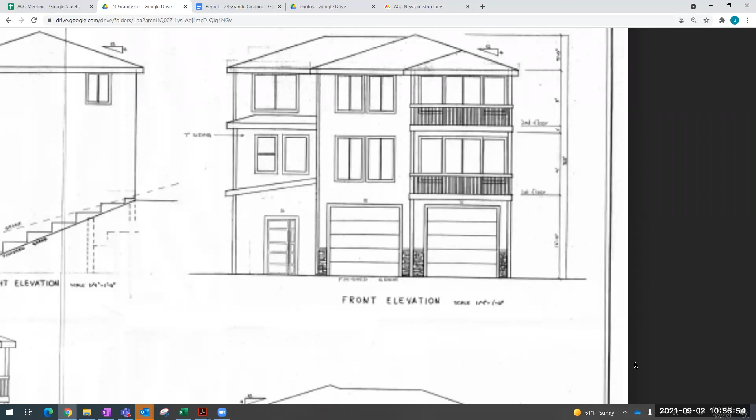I'm sorry, I've got to go change a diaper real quick. Alrighty then, it's not my diaper, but I'll be back in like a couple of minutes if you need further discussion, you can continue talking.

My thing is, I guess you'll be looking up at the garage lights, is how I see it. I'd rather see the lights on the sides of the garage, not above the garage. It's really a big radius, almost like a foot radius on the bottom. Oh yeah, I'm very familiar with them, I have one in my house. But the higher you hang them, the more you can see the bulb. That's the problem, if they're above the garage door, you're looking up into the light and it's not shielded. If they're lower on the sides of the garage, you'll shield more of the light, and you won't be projecting it out into the street and into the forest.

We usually put frosty LED lights, like glass fogged, not clear glass, so frosted. Well even with a frosted lamp, once a homeowner buys it, they can do whatever they want, right? They can change the light bulbs out if they're not happy. So that's why positioning is so important, because we don't want to come back in 2 years and say, hey homeowner, your 100-watt lights are upsetting your neighbor, and the owls are now flying into the side of your house because you're blinding them at night.

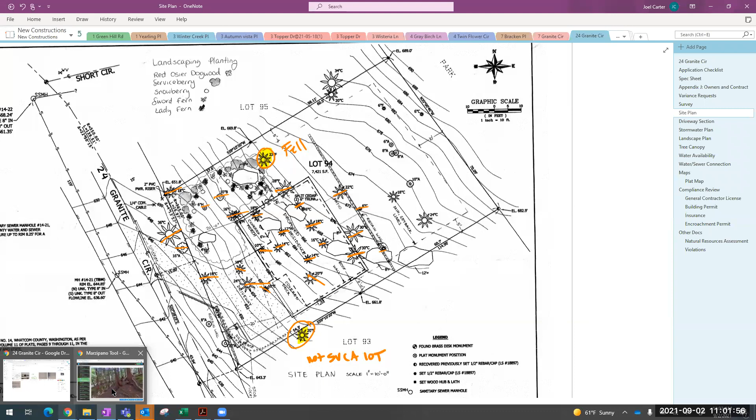Yeah, so we might do some rockery in the front because it slopes up, but in the back it's gonna be all level. So we'll probably do Allan Block in the back, and some rockery in the front too if we need to retain there, but that's pretty much the plan for now. Okay, so anywhere there's more than a 2-to-1 slope, if it's okay I'll make that comment — anything over a 2-to-1 slope, you do some rockery. Yeah, or some type of erosion control, retaining.

Okay, we'll make that comment. Colors were good. Did you have a variance? I didn't see one, let me look real quick. I don't believe you, we didn't have any variance, I think. All right, no variances, I'm back. Yeah, okay, no variances on this one.

So the only comments we put here, Joel, was anything over a 2-to-1 slope, he would put some rockery in for retainage. Is Allan Block in the back fine? Okay.

We would typically need a variance for his retaining wall going all the way over to the property line. This brings up that easement thing again, but in this case the house behind him is already developed, so I don't think that's going to be an issue here. If someone were allowed to come down and trench next to this guy's house to put in a utility line, and now he's got a retaining wall there, that's why I was so concerned about that before. But the house behind him is developed already and it's park behind him on the other side, so I think that's okay.

Yeah, I'm good, I just need those comments added, and then he's gonna change his lighting out for something with the frosted lens. I wonder if they make those same kind of fixtures, I like the fixture look, it looks nice. If they make those with a frosted lens cover, they might. I don't know, but I'll check into that, and if not I'll just go with something traditional with frosted glass, something to keep the light deflected from the street, because you are from the street looking up right at those bulbs, so that makes a difference.

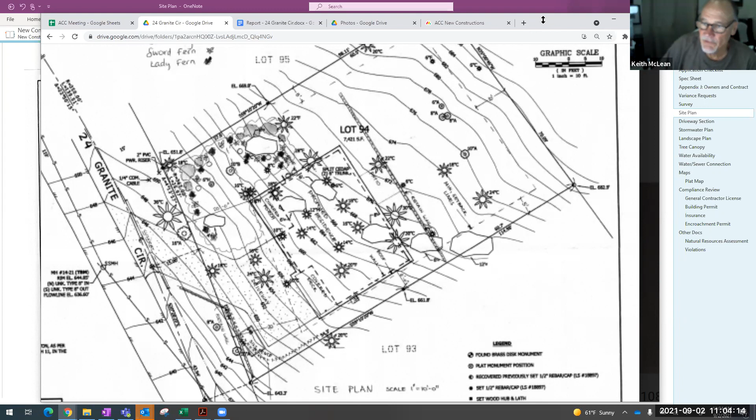And that one was 24. And now we're gonna see the same house at 36 Jasper.

All right, so the comments, I got those down: change lighting, 2-to-1 slopes, rockery, Joel to verify tree ribbon. I think that was the last one. Oh yeah, I've done that.

Yeah, there is that tree that was ribboned on the property next door. Either obtain permission to remove from your neighbor, and any other 2-to-1 slope or greater, you put some retainage in. Okay, rockery retaining wall. Yep, okay.

36 Jasper, I gotta get over there. 36 Jasper.

So same paint colors, it's the same house, right? Isn't that right? Yeah, those are the same, spec sheets the same. Yeah, you had one of his sheets mixed in with the other one, that's how I noticed it. It's the same exact house.

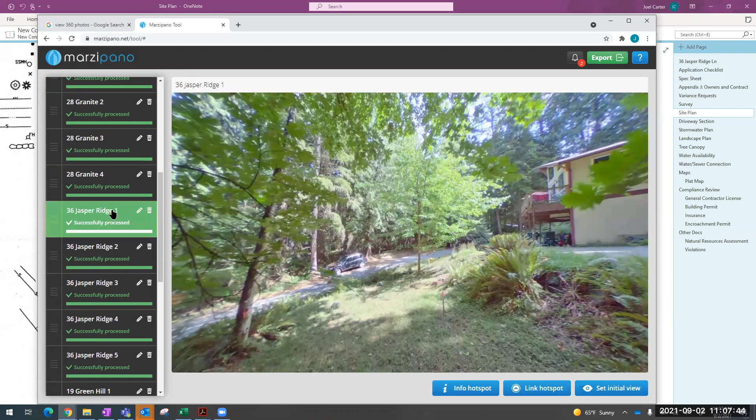Yeah, I'm switching over here. All right, 36 Jasper, so here's what our site looks like.

There is a little bit of encroachment from the neighboring lot here with their driveway and this little bit of retaining wall.

The part of the driveway up there you see, I believe, is gravel. Well, the part that does encroach.

And the neighbor's already been notified of that? Yeah, I already notified the neighbor and they're okay with the removal of everything that encroached on my property, and they have no problems with that. Okay, good. If you need Sudden Valley to get involved, you can contact Deanna on that, she can help you out. Yeah, so far no problems, they've really been cooperative.

Sorry, I'm losing track here. So trees are ribboned on site. Good news is it's not as steep of a lot. It does get steep in the back a little bit, but there's a nicer flat spot out here, so not the same heavy requirement for retaining walls. He does have a partial one proposed.

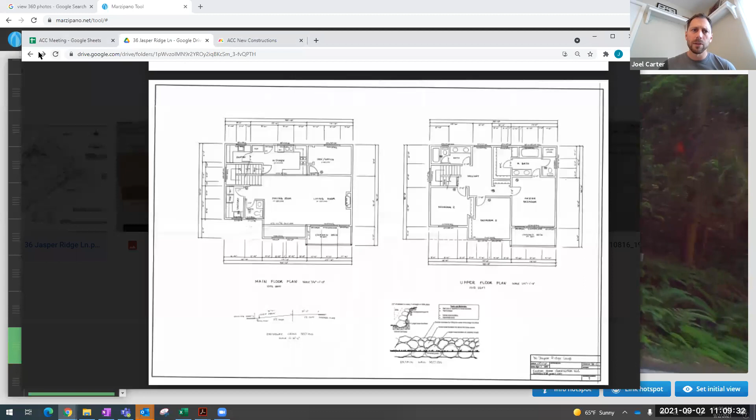I think we do have variances in for this. Do we? Let's see, I don't think so. Oh no, we don't. Yeah, we are within the height, we're at 18.3 on definition 2.

Driveway slope is good, property coverage is really good, open space is really good. The only details here needed showing that finished grade indication at each wall, similar to the last one. And then I'm asking to provide the stormwater detail and calculations.

So this one, the previous one, 24 Granite, they used an engineered plan. On this one, 36 Jasper, they're going with the Whatcom stormwater. Yeah, that's how the ballot's proposed.

Using so there's a workbook, for those of you who are new, there's a Sudden Valley stormwater workbook where the builder can go through it and work out the calculations based on the square footage of impervious surface, and it'll spit out a number on how big your system needs to be, your stormwater infiltration trench.

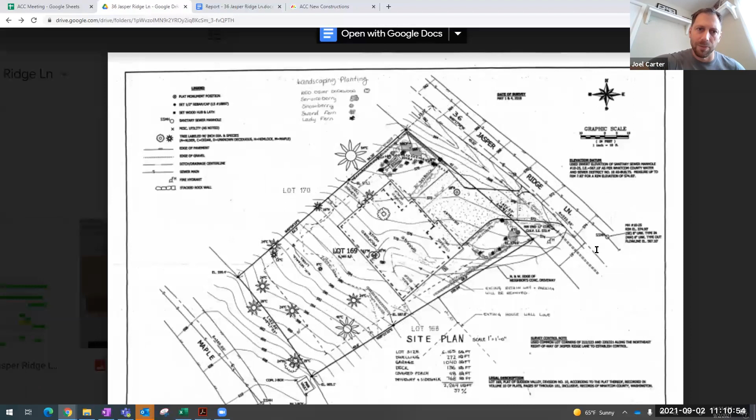He's got the stormwater on the plan, but just having those calculations that's been asked. So the thing is all the calculations are with the county, and the only thing I was gonna ask you guys is that they're asking for records, stormwater documents that I submitted to you guys to sign by ACC, but it's been almost a month and I haven't heard anything. It's just paperwork that needs to be filled out and notarized and submitted to the county, saying it needs to be recorded as an easement for the stormwater. I'm sure you guys are familiar with that. So that's something I need to submit to the county, and after all the approval, they'll give me all the calcs for the stormwater, everything that's already been done before.

I'm not sure I understand that. So the executive board is aware of it, they have it right now. The last time you called, I did check in on it. From what I know, their attorney is looking at it, so they're just waiting for it to come back to them. Once they figure that out, they'll return it to you. I did pass on your information as well, so they could contact you personally. But that's the last update I have, and I believe that was last Friday when we talked.

Yeah, so it's in process, as I understand, right? Absolutely. Okay. Yeah, it's just the application that needs to be filled out by Sudden Valley, because it's a Sudden Valley system that has been approved by Whatcom, and so that's where we're going with it.

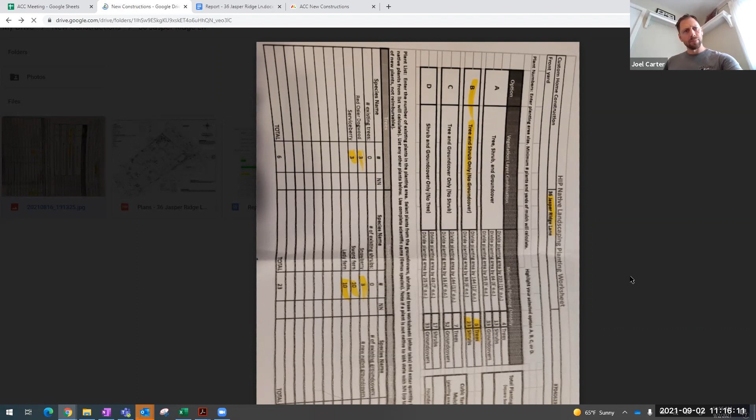What's going on my screen here? Yeah, the worksheet. Yeah, we got our worksheet completed. All right, you do have that. How come I didn't see that? Yeah, I didn't see that worksheet. Ah, there it is. Yeah, I just can't turn it sideways. Okay.

All right, do we have any other issues or comments on this one? Is that a no? Then I need a motion. I motion to approve. Can I get a second? I'll second, JoJean seconds. All in favor? Aye. Okay, that's unanimous.

Is that with the comment about changing the lighting? That's correct, yes. Is there any other comments on there? Not on this one, we didn't have, not that I recall. Let's see.

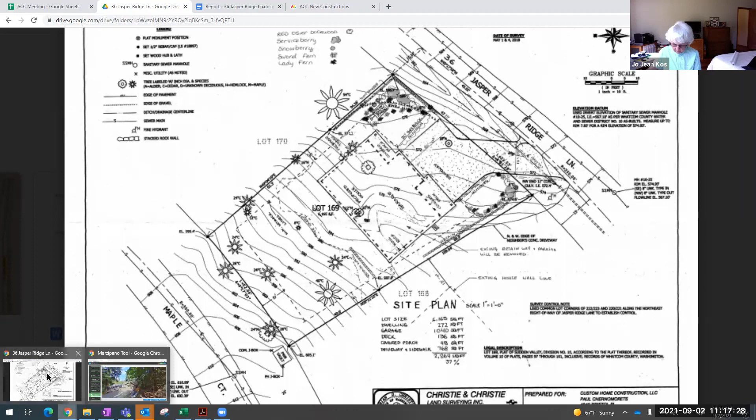We have something with that tree, right? On the property line? Yeah, the shared SVCA tree. So, SVCA is in approval with that being removed. He can remove that when he's having his trees removed. Okay. It looks like it's right on—if it's a 50-50 call, right? Yeah, it's like 50-50, right in the middle. Yeah, it appeared to be co-owned. Yep, all right, we're good with that.

And I think that is it. Okay. All right, thank you for your time, Paul. Thank you very much, appreciate it.

Okay Joel, is that to wrap up your new constructions? Yeah, so I think that makes 43 new constructions this summer. Yeah, it was crazy, the most I've ever seen. And then that last week in July, approaching that cutoff date, we got all these seven.

There was the other one still on the agenda, 19 Hillside, and they got that 30-day window. That was item number 24 on the agenda, so I guess we don't need to talk about that one. So that's why you'll see seven new constructions here, but we did six today, and we did it in two hours and twenty minutes.

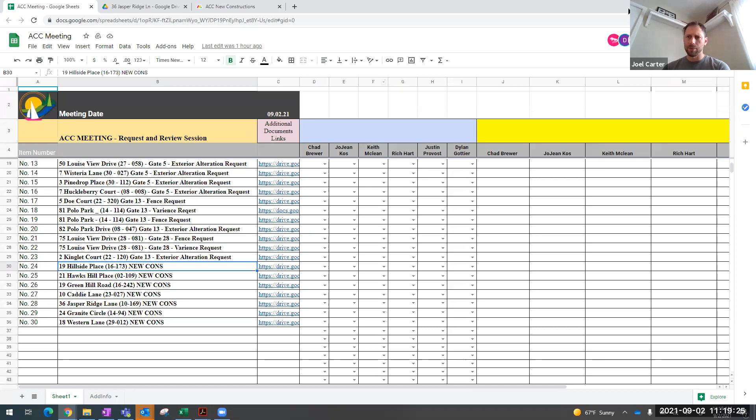Yay, that's amazing, record time. Great. Well, yeah, great. All right, I don't think I have anything else to show you right now or to discuss, but if you have any other questions for me.

All right, that's it right now, man. So when are we doing 19? What's up with that one then? Which one, 19 Hillside? Yeah. So there was—you sent an email out saying that was DJ. So they submitted that one back in. Oh yeah, that one already got— Yeah, we got the automatic, and they're good guys. Yeah, they're good guys, so far everything I've seen they've done they've been really good, conscientious builders. So, all right, very good. That was an automatic approval.

All right man, we'll get on with our regular stuff. Thank you Joel, I appreciate your time. Great, thank you, thank you everyone. All right, my pleasure.

Okay guys, so now we're back to our regular agenda items, we got the new constructions out of the way. Just to make sure I'm in the right spot, I don't think we did any of them yet. So we'll start out with item, I have it as item number 1, which is 50 Windward Drive. What do you guys show it as? 2. Number 1. It is number 1. Okay, let me make sure I'm on right here. Yep, okay, that's what I have as well.

50 Windward Drive, we had a small tree in bad shape. Oh yeah, I went out to this one. Yeah, I actually went out and looked at this one, and I had it as a small tree in bad shape. So did anybody else go out and take a look at it, what'd you think? I move to approve. Okay, can I get a second? I second. Okay, all those in favor? Aye, aye. Okay, that's unanimous.